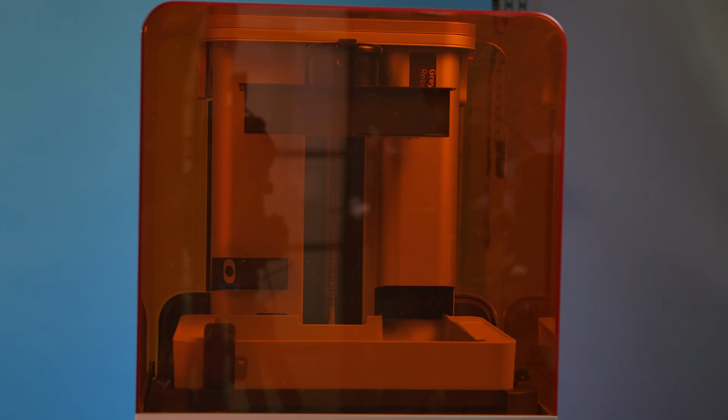Hi, I'm Michael. I'm a B2B sales associate here at Shop3D, and I'm here to give you an overview of the Formlabs Form 4. The Form 4 is a stereolithography, or SLA, 3D printer, which means that it uses a liquid photopolymer, aka resin, to print. This resin reacts with light to turn from a liquid into a solid.

Taking a look at the outside of the printer, one of the first things you'll notice is the large touchscreen interface at the bottom here, which features a matte finish to reduce glare and make it easier to see. Quickly going over connectivity, you're able to connect to the Form 4 over Wi-Fi, Ethernet, and USB-C. So really, any way that you want to connect to the Form 4, you can.

Lifting the hood to take a better look inside. Two of my favorite features of this printer are its build volume and its speed. The printer is super fast, completing most prints in under 2 hours. Compared to the Form 3, it offers a larger build volume, coming in at about 30% larger. And if you just look at the build platform, you'll see that it's wider than before. In total, the Form 4 has a build volume of 200 by 125 by 210 millimeters.

Next, we can see the inclusion of a webcam here for the first time, which allows for live remote monitoring, as well as taking time lapses of your prints. There's also an ultrasonic sensor located here to measure the level of the resin in the resin tank.

The resin tank itself is also brand new for the Form 4. Compared to the Form 3, this tank is cheaper and lasts even longer. Also, unlike the Form 3's tank, this one will last for the same number of prints regardless of what type of resin, whether it's abrasives or what have you, that you're using.

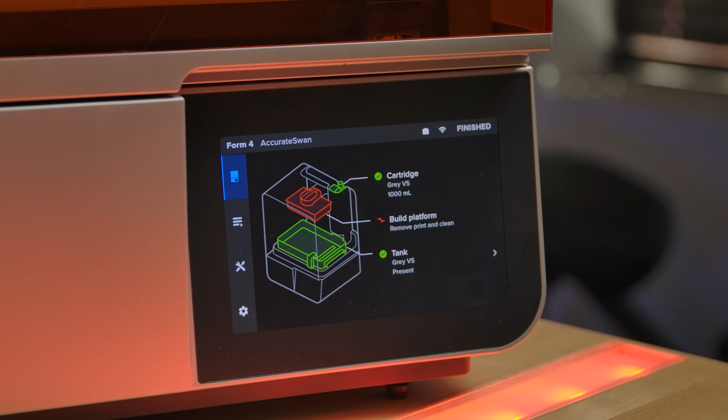MSLA uses an LCD screen to selectively block light emanating from a powerful LED array, only exposing the resin where we want it to harden. This means that there are no moving parts and that an entire layer is exposed at the same time and quickly cured. The LCD screen used also has a very high pixel density with a pixel size of 50 microns, giving you extremely fine details.

In addition, the microtexture surface that Formlabs applied to the top of the LPU allows the low-force film of the resin tank to peel very quickly. It's a combination of this and the use of MSLA that gives us those really, really fast print speeds.

The resin cartridge, which you can see here, is also new for the Form 4. It features a new form factor, which is more bottle-like compared to the kind of book-shaped old cartridges. This makes them easier to store, handle, and carry, while also using less plastic than before, so it's even more eco-friendly.

A very nice benefit of the new design, especially when filling a tank with resin, is that the bottle drains much, much more quickly now, about 10 times faster than before, thanks to new valve designs. You can also see what resin is loaded into the printer through the window in the back, right here, and also with the new RFID chip in each cartridge, which the printer will read automatically.

You might also have noticed that the resin here is a new formulation. This is their Grey V5. It's actually much closer to the old Grey Pro in terms of performance. Compared to the standard Grey V4 resin that we previously had, the V5 is stronger, produces finer details, and just overall has better mechanical properties. And it even comes in at a cheaper price.

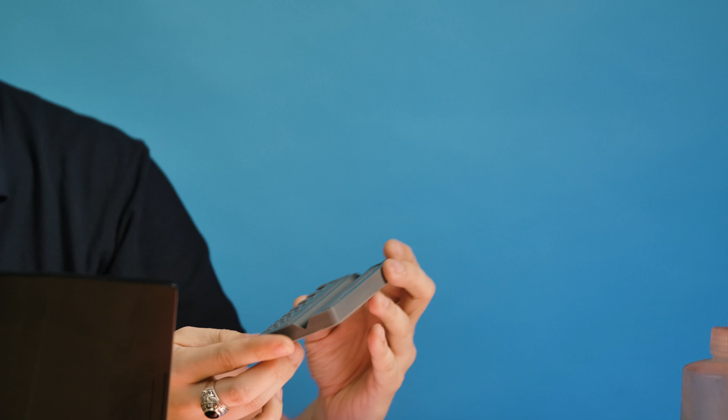So on my screen right now, I have this sample part here. It's a screw measuring gauge. It has a number of different features, including a measuring tool for measuring the lengths of screws. It's also got some slots here for measuring the size of the heads. And overall, it's just a great print because there's a lot of fine features on it and there's a lot of details.

We printed this on the Form 4 directly on the build plate. It's not ideal, but we were printing it for testing purposes just to see how fast we could print it. So when we printed on the Form 4, I think it took about 40 minutes overall to print to completion versus if we had printed it on the previous generation, the Form 3, the expected print time was about 2.5 hours. So that is a very significant increase in speed in terms of printing.

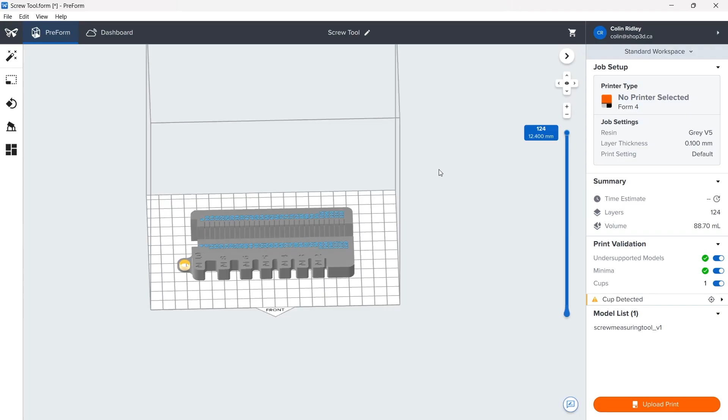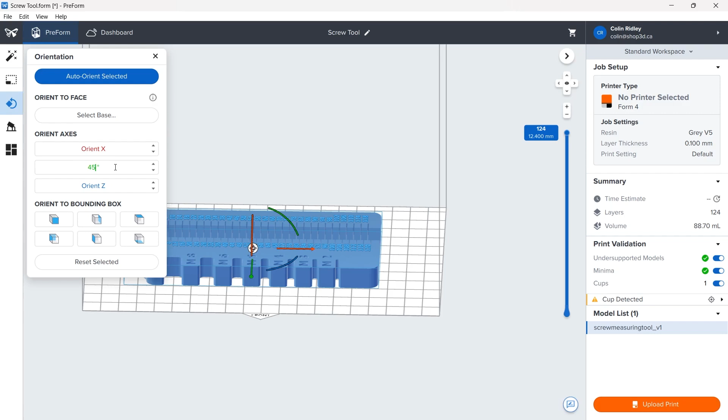So on my screen here, I've got the model laid out in PreForm. I have it directly laid out on the build plate. Now this is not the most optimal method of printing. Ideally, because this has got a large flat surface, you would want to pitch this model on an angle. Ideally, you would want to do at least 20 degrees, but in this case, because it's such a large and flat feature, I'm going to pitch it to a 45-degree angle.

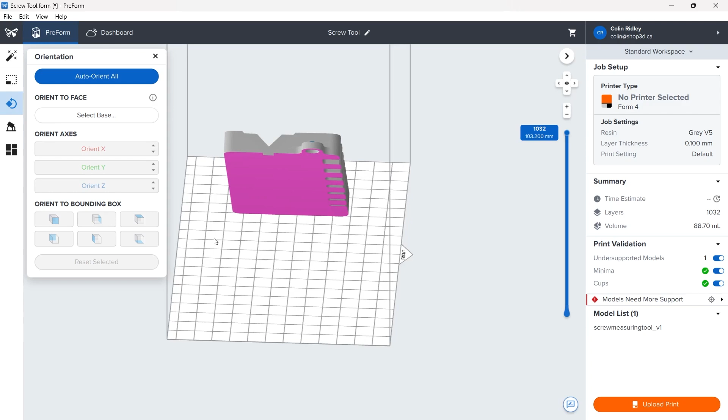The reason being is large flat surfaces create a lot of suction when printing, and so you want to pitch them to minimize the amount of flat surfaces printed per layer. So I've oriented it now in a 45-degree angle, and I am then just going to quickly examine the model from all the different sides and make sure everything looks good before I turn on the supports.

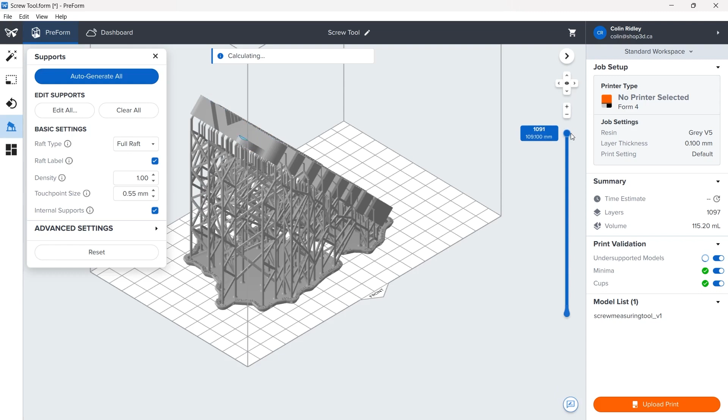So I am then going to go to the support tab and I'm going to generate the supports. Typically I let PreForm just do the auto generation. It's pretty good with generating the supports. It does take a minute to generate, but it is much faster now compared to the Form 3 in terms of just generating the supports. So I'm just going to do one more quick look over, just make sure everything looks good before I send the print over to the Form 4.

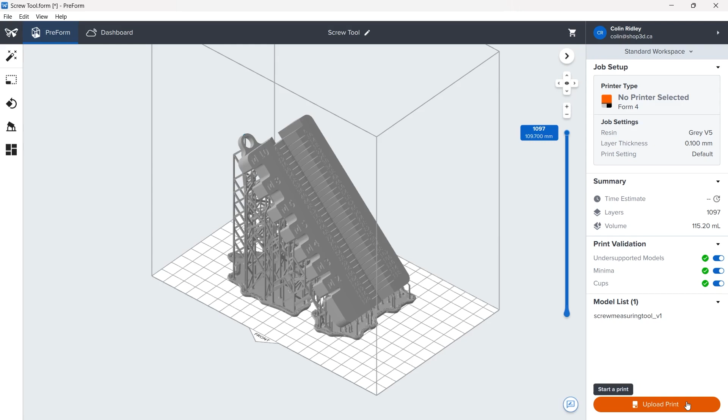So everything here looks good. I don't see any real issues. Over here you can see there's nothing being flagged, there's no cupping, there's no unsupported areas, so everything looks good. I am then going to upload to our printer. I'm going to add it to the queue. The reason why I add it to the queue and not print directly is because I like to do some pre-printing checks. So I like to just make sure the printer is ready to go before I just send it and start it. I don't like to just start the print right off the bat.

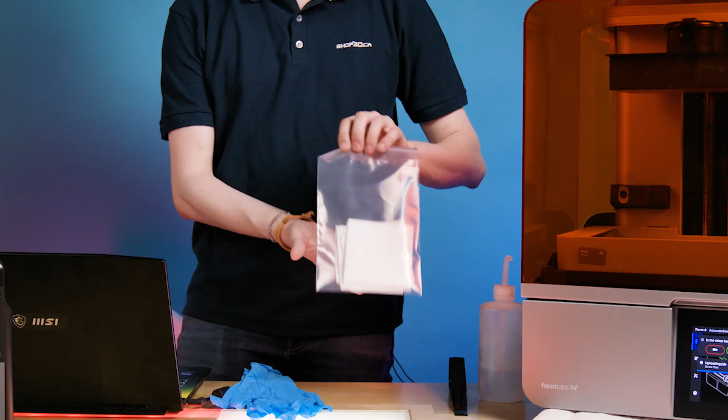So I'm uploading the print now. I've also laid out some tools and some supplies I would normally use for doing these pre-print checks. So I've got some nitrile gloves, some PEC pads that I've kept in a bag just to keep them clean, and I have some isopropyl alcohol here in a bottle, and then I do have a scraper tool that's predominantly used post-print. You don't really need it pre-print.

So I'm going to put the gloves on. You always want to have gloves on when you're handling anything related to the printer. You don't want your natural skin oils like grease or dirt getting anywhere in the printer, especially on the tank. So I'm going to come around now.

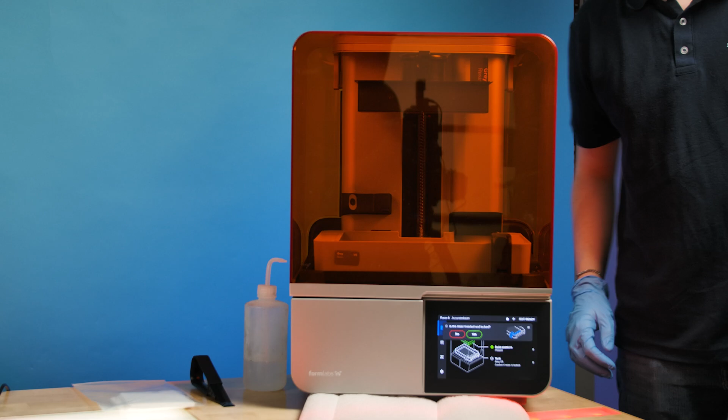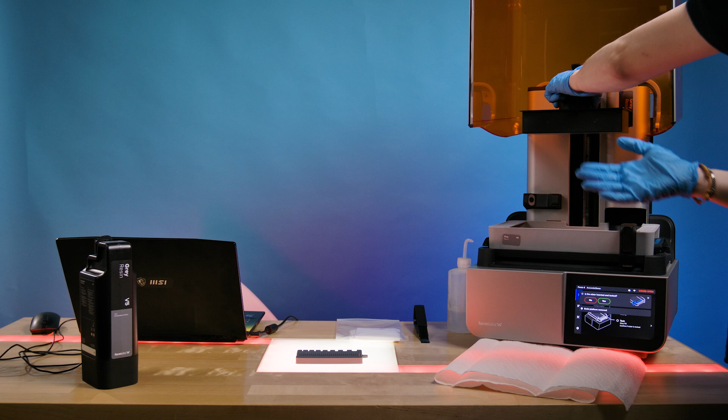I'm going to lift the lid up. Whenever you're not printing, you want to keep the lid closed at all times just to help preserve the life of the resin. So the first thing I'm going to do is I'm going to unlock the build plate. I'm going to visually inspect it for any cured resin or any residue from the resin. Just make sure overall it's clean, which in this case it is.

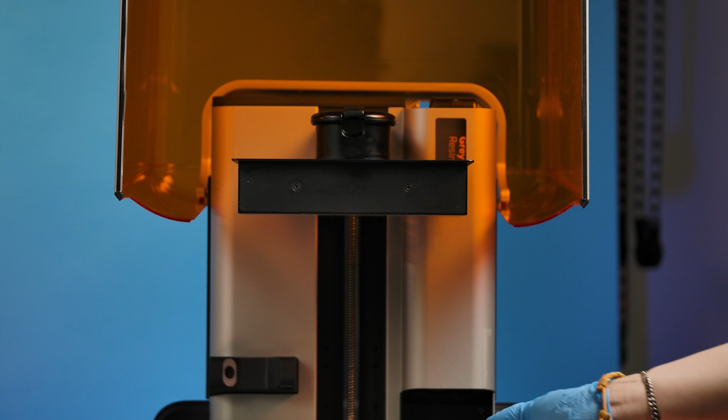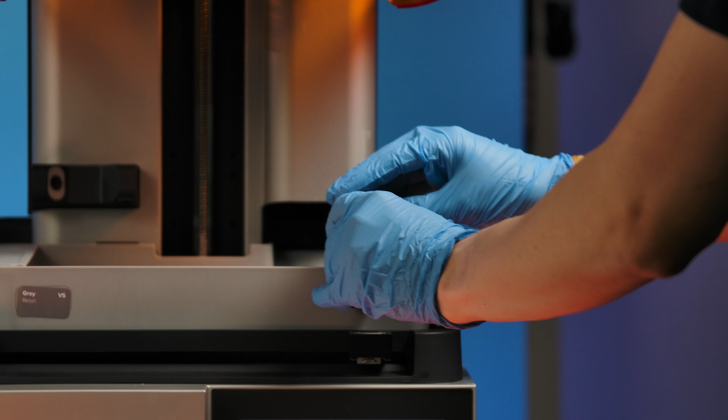I'm going to push the build platform back in. I'm going to wait for that click, and then I'm going to mechanically lock it with the lever. The next thing I want to do is I want to unlock the mixer, and I just want to have a brief glance at that, make sure there's no trapped debris in it, which in this case there appears to be nothing obvious. I'm going to then lock it back into place, or in this case, actually no, because I need to take the tank out first.

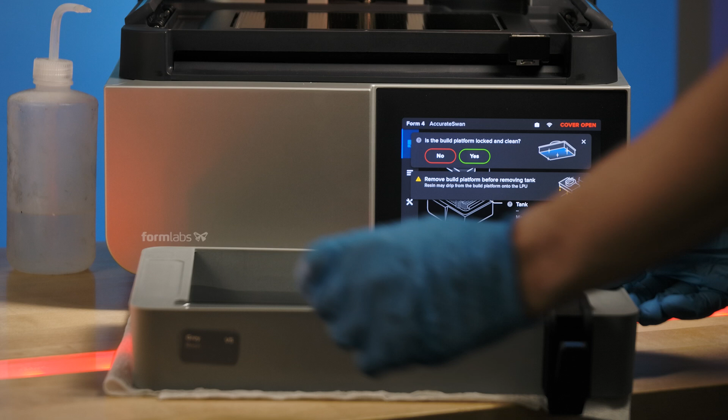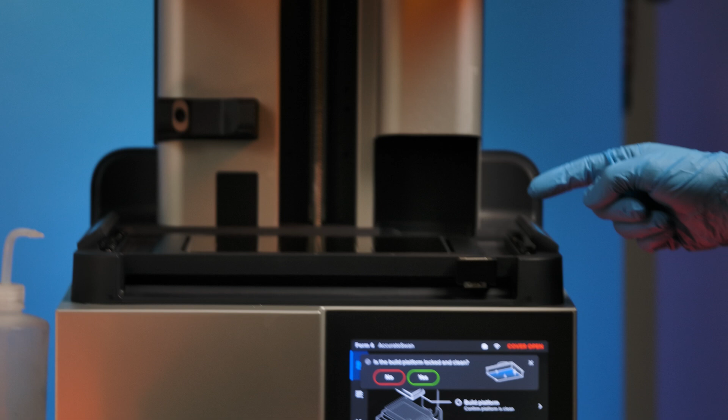So next I'm going to take the tank out and just visually inspect that, which in this case it doesn't appear like there's anything really of concern. I'm just moving the wiper back a bit just to check there's no glaring issues. The last thing you want to check is the release textured plate here, and I don't see really any fingerprints or dust or debris, so I think we're good to go at this point.

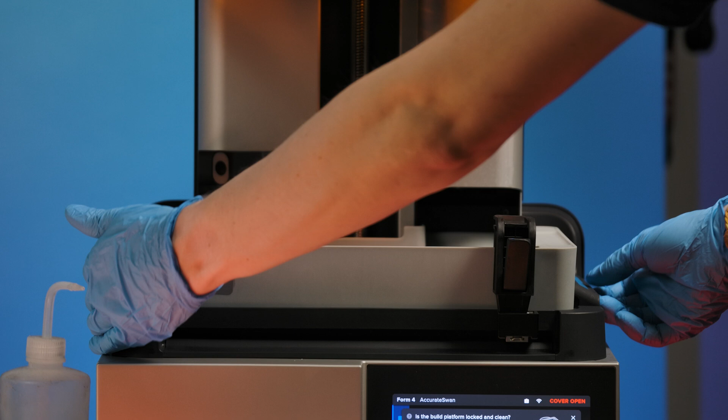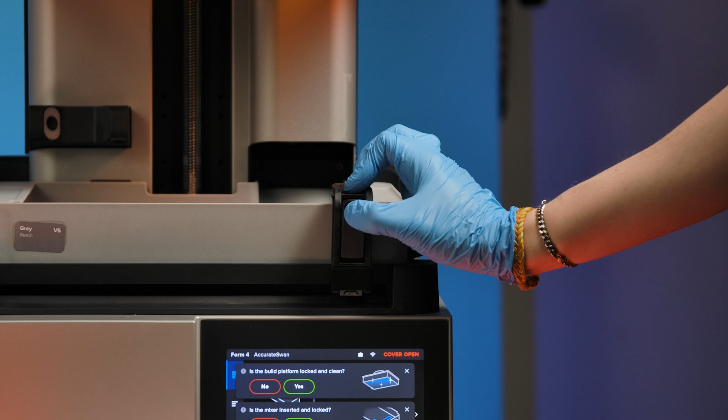So I'm going to put the tank back in. I'm going to lock it from both sides. In this case, it's not locked in. And then you hear that audible click. So the tank is now locked in, and then I'm going to go ahead and lock the mixer, which is locked. And then on screen, it's asking you to verify that the build platform as well as the mixer is locked, which in this case they are. So I'm going to hit yes to both.

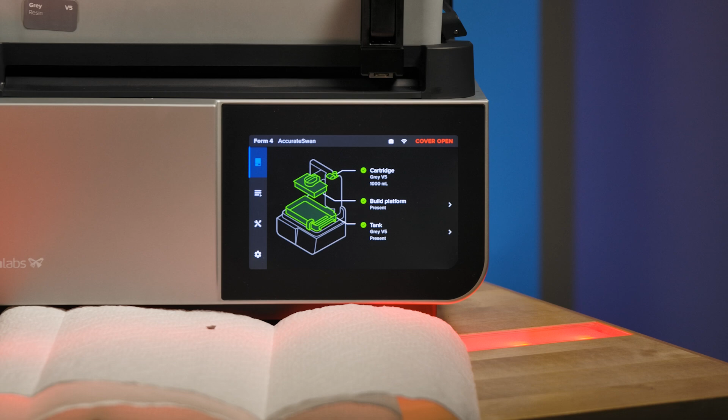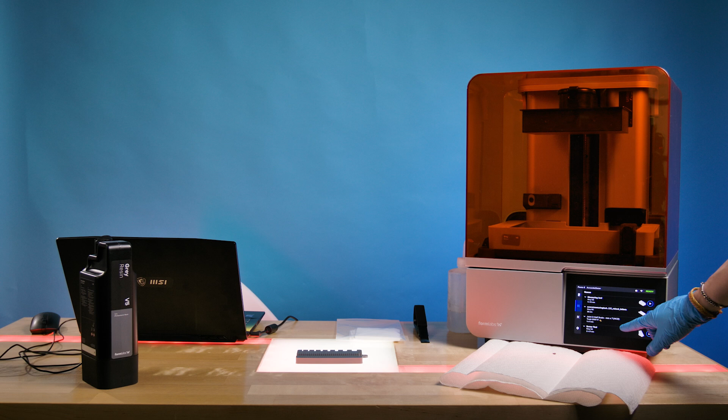I'm then going to close the lid. The last thing you want to do is just check that the resin cartridge is inserted correctly, which it is. You'll hear a click. Also, you want to make sure that the cap is open. And then at that point, we're ready to go. So I'm going to go to the queue menu, and I'm going to find my print, and I am going to hit start. And the printer is on its way.

And that pretty much concludes the demonstration. So thank you for joining me. Up next, we're going to have my colleague Cha talk about a use case for the Form 4.

Hey guys, my name is Cha. I work in the technical service department of Shop 3D at Mississauga. Today I'm going to talk about a recent project I worked on with a customer of ours by using the Form 4 technology. I've previously done this project before on the Formlabs Form 3 printer, and we've seen great results. Formlabs has always offered ease of use and good surface quality, but specifically to this project, I saw a significant improvement, and I thought it was an interesting case to talk to you guys about.

For a while now, we printed proof of concept molds for customers, and these are basically molds that are going to be used a couple dozen times. They just want to see what the final form is, and they don't want to go through the expensive costs of machining it out of steel or aluminum. And so we'll create a plastic mold for them, and based on this mold, they'll do thermoforming and get their test piece or sample piece. And that's the goal here.